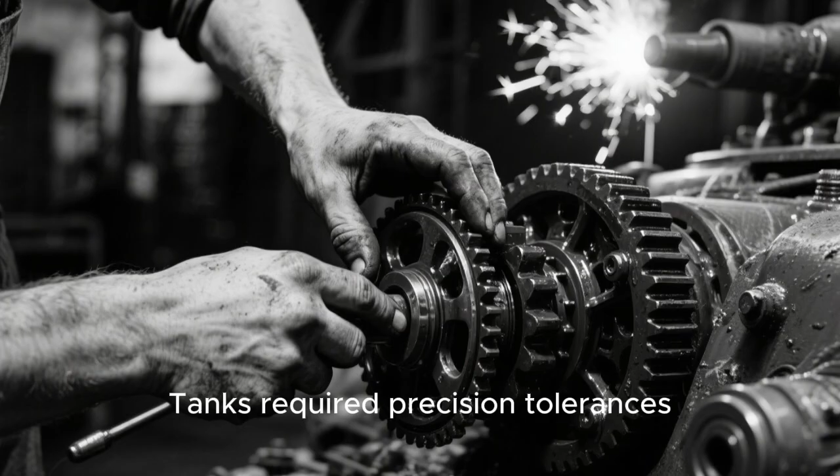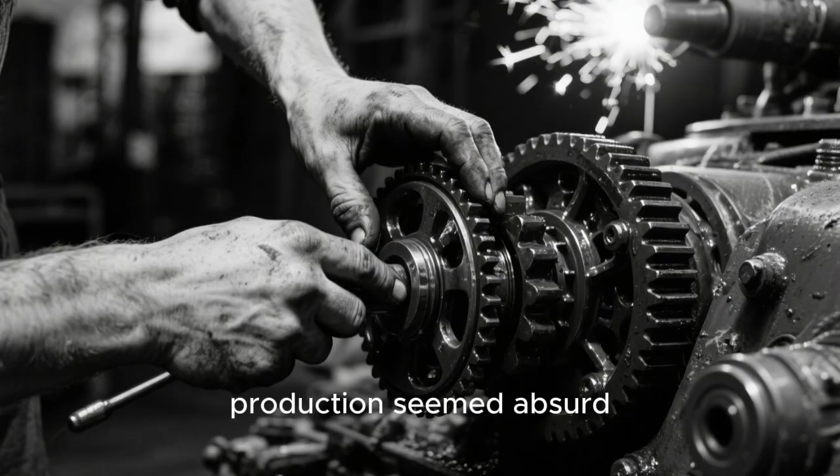Tanks weren't cars. Every military expert said so. Tanks required precision tolerances, specialized armor plate, complex transmission systems, and weapons integration that demanded individual craftsmanship. The very idea of mass production seemed absurd, but Knudsen had heard impossible before.

The British experience told a grim story. According to manufacturing reports from the Ministry of Supply, referenced in David Edgerton's Britain's War Machine, British factories struggled to produce 1,500 tanks annually despite total mobilization. The Germans, with their vaunted industrial efficiency, managed perhaps double that number. Meanwhile, Hitler's panzer divisions were cutting through Soviet defenses, destroying thousands of tanks in weeks. The mathematics were brutal. If America entered this war, current production methods would be utterly inadequate.

The Army brass didn't help matters. General Jacob Devers, chief of the armored force, insisted tanks required specialized facilities and specialized workers. His engineers presented Knudsen with specifications that seemed designed to prevent mass production: custom-cast hulls, hand-fitted turret rings, individually calibrated gun sights. Each component carried tolerances measured in thousandths of inches. One colonel actually argued that assembly line methods would compromise battlefield reliability, as if German shells cared about manufacturing philosophy.

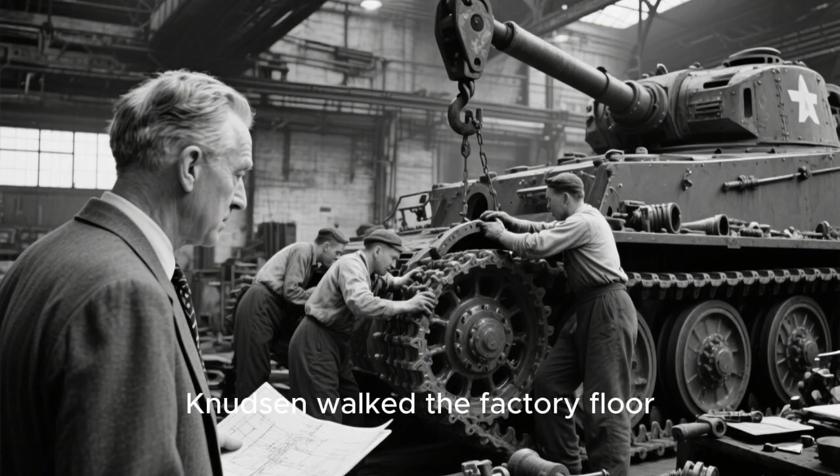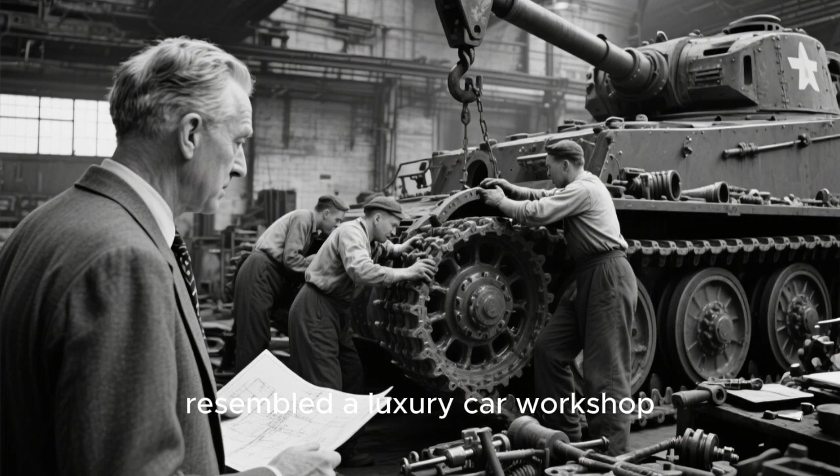Knudsen walked the factory floor, his engineer's eye cataloging inefficiencies. Here, three men spent two days fitting a transmission housing because each tank's frame dimensions varied slightly. There, specialists hand-riveted armor plates in sequences that couldn't be standardized. Overhead cranes moved glacially, positioning components that required precise manual alignment. The whole operation resembled a luxury car workshop, not a wartime production facility.

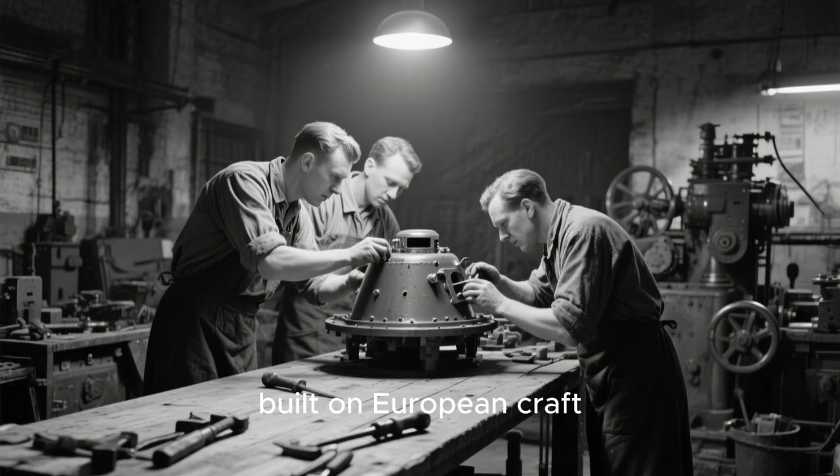The problem wasn't the workers. American industrial labor was the finest in the world. The problem was the process itself, built on European craft traditions that had dominated weapons manufacturing for centuries. Knudsen recognized the challenge immediately. He needed to convince both military leadership and manufacturing engineers to abandon centuries of doctrine and embrace something that had never been attempted at this scale. His impossible blueprint was already forming, though even he couldn't yet see how revolutionary and controversial it would become.

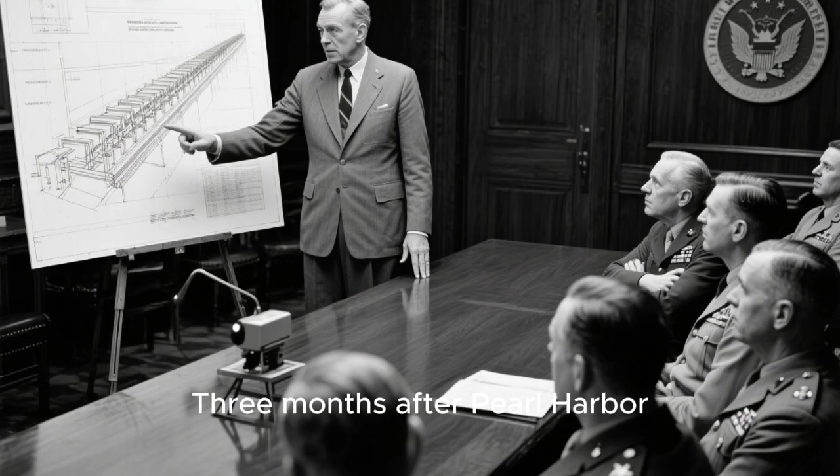Early 1942, three months after Pearl Harbor, Knudsen presented his proposal to a conference room full of skeptical generals at the War Department. The plan looked insane on paper: transform tank production using assembly line principles, standardize every component, and implement interchangeable parts across entire production runs. The target? 500 tanks per month from a single facility, a number that exceeded America's entire annual output just one year earlier. Colonel James Chibber, the Army's chief ordnance officer, spoke first.

"Mr. Knudsen, tanks are not Chevrolets. You cannot simply stamp out armor plate and expect it to withstand 88mm shells." His tone carried the weariness of a professional addressing an amateur. Around the table, heads nodded. These men had spent careers managing weapons production through traditional methods. They understood metallurgy, ballistics, and battlefield requirements. What did a car manufacturer know about warfare?

Knudsen expected this resistance. He'd brought blueprints, production flowcharts, and something else: photographs from the Chrysler Tank Arsenal construction site in Warren, Michigan. The facility, barely broken ground, would become the largest tank production complex in the world. But none of that mattered if he couldn't change how these men thought about manufacturing.

"Gentlemen," Knudsen began, his Danish accent emphasizing each word, "you are correct that tanks are not cars, but production is production. The principles do not change." He unrolled detailed specifications for the M3 medium tank, soon to be replaced by the M4 Sherman. "Every inefficiency in your current system comes from variation. Each tank is slightly different, so nothing is interchangeable. Workers must fit parts individually. You cannot train new labor because every assembly requires judgment. You have created a system that cannot scale."

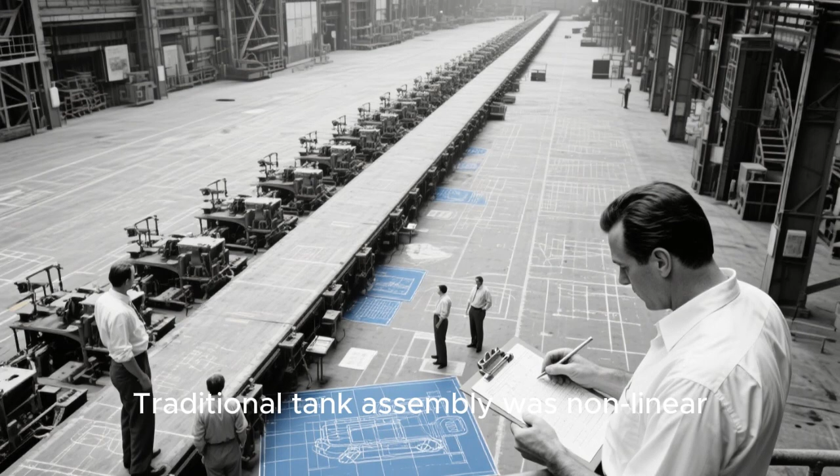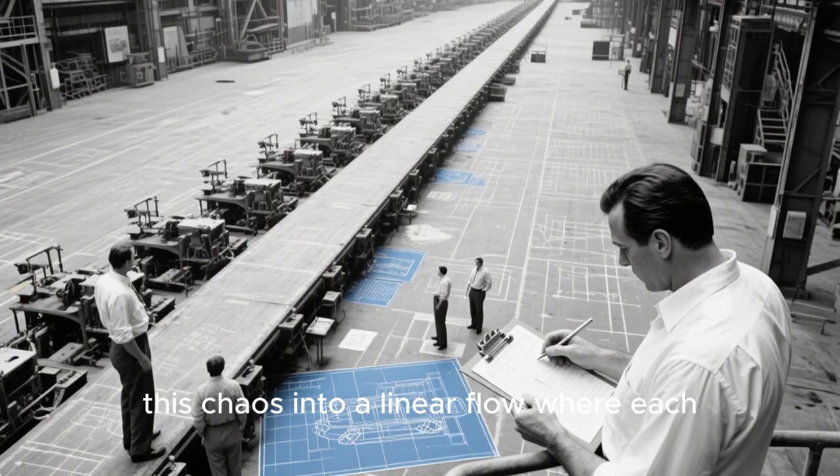The central challenge was sequencing. Traditional tank assembly was non-linear. Different teams worked simultaneously on various components, eventually converging in a final assembly that required extensive fitting and adjustment. Knudsen needed to transform this chaos into a linear flow where each station added specific components in a predetermined order, with each tank moving continuously through the facility, like cars through a Ford plant.

Edward Rushton, a former Ford production supervisor, led the floor planning team. His task seemed impossible: map every single operation required to build a Sherman tank, determine their optimal sequence, calculate precise timing for each station, and design tooling that would allow semi-skilled workers to perform tasks that currently required craftsmen.

Rushton's team created a massive flowchart that covered an entire warehouse wall, tracking dozens of parallel sub-assembly lines that would feed into the main production sequence.

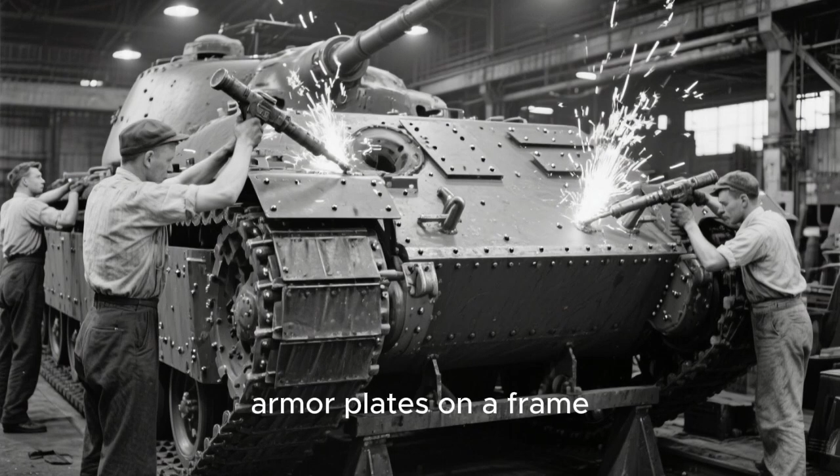The hull assembly illustrated the challenge. Traditional methods involved positioning armor plates on a frame, hand-drilling thousands of rivet holes to match each plate's unique position, then riveting them in place—a process taking days. Knudsen's system required pre-drilling all holes in stamped plates at a separate station, using precision jigs that ensured every plate was identical. Workers at the hull station would simply position plates against standardized fixtures and rivet them in predetermined patterns. No measuring, no marking, no custom fitting.

Critics called it a fantasy. Colonel Raymond Barker, assigned as military liaison to the project, watched early tests with barely concealed skepticism. 'You're assuming perfect parts,' he observed, as workers struggled to fit a transmission housing that was millimeters off specification. 'In reality, nothing is perfect. That's why skilled fitters are essential. They compensate for variation.'

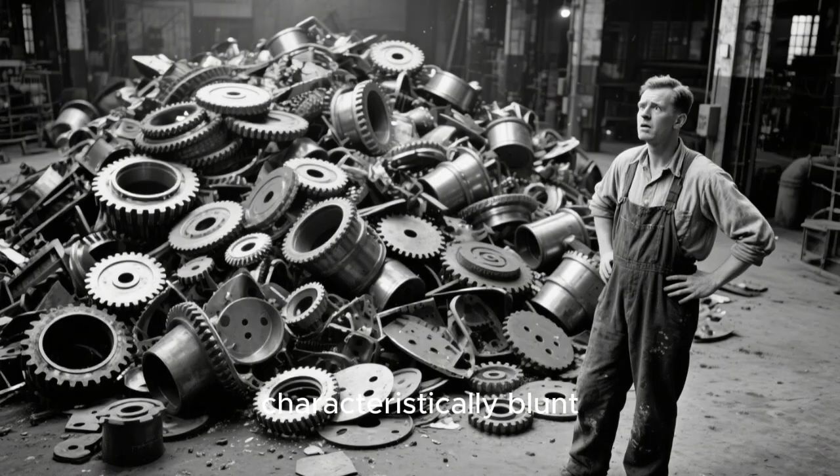Knudsen's response was characteristically blunt: 'Then we must eliminate the variation.' He established quality standards more rigorous than anything in automotive production. Suppliers received specifications with tolerances measured in 10,000ths of an inch. Components that deviated were rejected entirely, not adjusted. Early rejection rates exceeded 30%, creating supplier chaos.

One transmission manufacturer called Knudsen's standards theoretically achievable but practically impossible. According to War Production Board documents, referenced in Arthur Herman's Freedom's Forge, Knudsen personally visited struggling suppliers, bringing automotive quality control experts who taught precision manufacturing techniques.

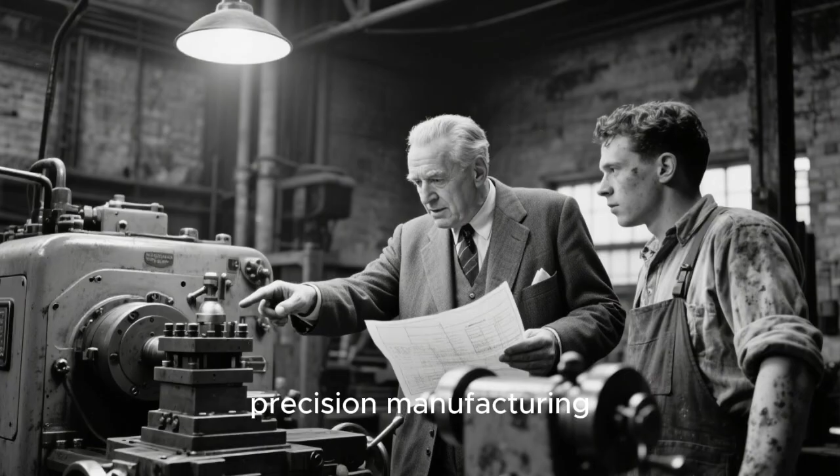He replaced suppliers who couldn't meet specifications, even when it meant short-term production delays. The message was clear: the system required perfect parts, and nothing less would be accepted.

Meanwhile, the human element presented equal challenges. Traditional tank workers were skilled craftsmen with years of metalworking experience. Knudsen's system needed thousands of workers who could learn specific tasks in days, not years.

Industrial psychologist Adelaide North joined the team, studying how to break complex operations into simple, repeatable motions. She developed training programs that taught single operations in isolation, then gradually introduced workers to adjacent tasks.

The approach seemed dehumanizing to some observers. Workers weren't learning a trade; they were learning to perform specific limited operations. Union representatives worried about de-skilling labor, reducing proud craftsmen to interchangeable machine tenders.

Knudsen acknowledged the concern but remained pragmatic. "We need 10,000 workers in 6 months. We cannot train 10,000 craftsmen. We can train 10,000 specialists."

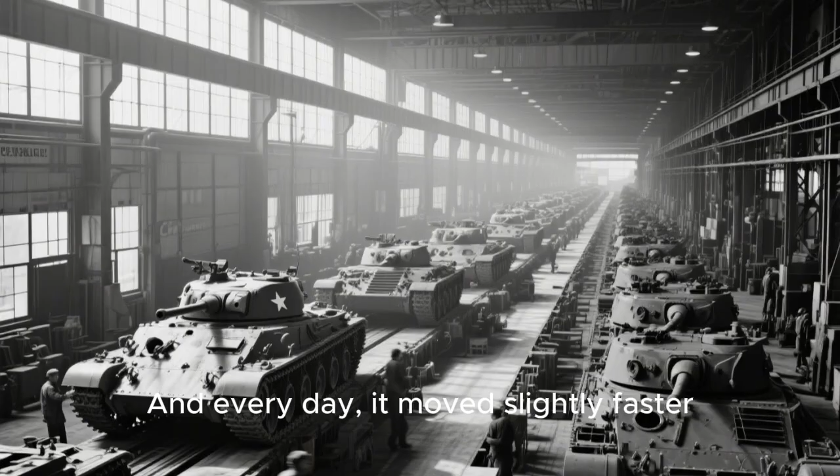By May 1942, the first Sherman tanks began moving through the prototype assembly line. They moved slowly, far slower than Knudsen's projections. Bottlenecks appeared at unpredictable stations. Tooling failed. Workers struggled with sequencing. The first assembly line Sherman took nearly as long to build as a handcrafted tank, but it moved, and every day it moved slightly faster.

The real test was approaching. Could this system produce combat-ready tanks that would actually work in battle?

The first 50 assembly line Sherman tanks rolled out of the Chrysler Arsenal in July 1942, their olive-drab paint still curing as they were loaded onto railcars bound for California, then ships to the Pacific. Knudsen felt no celebration, only grim awareness that his untested system was about to face the ultimate validation. If these tanks failed in combat because of production shortcuts or quality issues, his entire program would collapse. The Army would revert to traditional manufacturing, and America's tank production would remain inadequate for a two-front war.

The Marines received the Shermans at Guadalcanal with desperate gratitude. They'd been fighting with M3 Stuarts, light tanks that were outgunned and under-armored against Japanese positions. The Shermans represented a massive firepower increase. But would they actually work? Tank crews examined them with suspicious eyes, comparing these mass-produced machines to the handcrafted tanks they'd trained on.

Lieutenant Harold Bauer commanded one of the first Sherman platoons into combat. His after-action report, preserved in Marine Corps archives, revealed immediate problems. One tank's transmission failed after just 8 hours of operation. Another experienced turret ring jamming, the kind of issue that occurred when parts weren't properly fitted. A third developed engine problems that mechanics traced to inconsistent assembly of the cooling system. Out of 12 tanks in the initial deployment, 4 experienced mechanical failures within the first week.

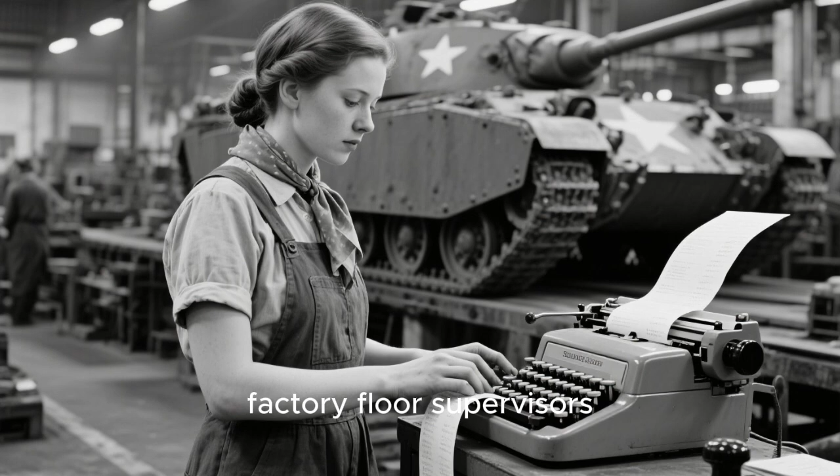Knudsen didn't defend the failures. Instead, he implemented what became known as battle line feedback, a direct communication channel between combat units and factory floor supervisors. When a tank failed in combat, engineers in Detroit would receive detailed reports within 48 hours. They would identify the root cause, implement corrections, and track whether the issue recurred. This created an unprecedented feedback loop between battlefield performance and manufacturing process.

The improvements came rapidly. The supplier with quality control problems was given 2 weeks to meet specifications or be replaced. They met the deadline. The assembly sequence causing engine issues was reorganized, with additional verification steps. Most significantly, Knudsen established a combat simulation protocol where every 10th tank would be subjected to accelerated stress testing before shipment, identifying potential failures before they reached combat zones.

By August, the second wave of Shermans reached the Pacific with dramatically improved reliability. According to military logistics records, documented in R. Elberton Smith's official Army history, The Army and Economic Mobilization, operational readiness rates exceeded 80%, higher than handcrafted tanks produced through traditional methods.

The assembly line Shermans weren't just adequate, they were becoming genuinely reliable. But reliability alone wouldn't win the argument. Knudsen needed to prove that his system could scale, that the Chrysler arsenal could actually produce tanks at rates that would change the strategic calculus of the war. The generals had given him a production target that still seemed impossible: 1,000 tanks per month by December 1942.

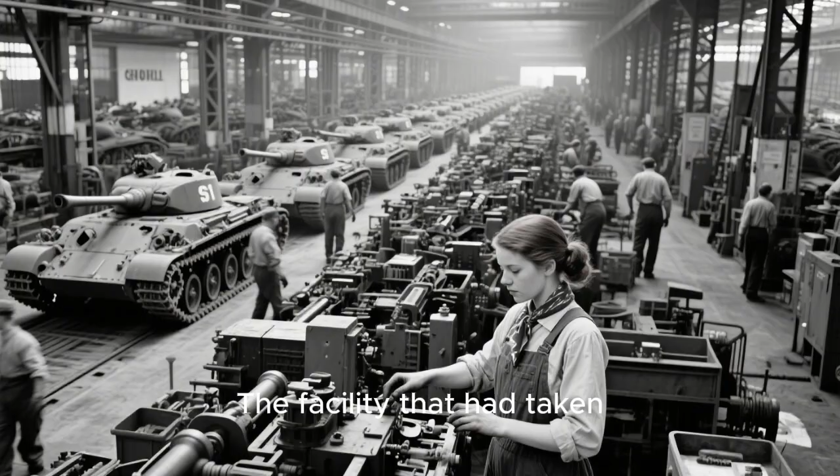As summer turned to autumn, the assembly lines accelerated. The facility that had taken weeks to produce a single tank was now completing tanks in days. Workers who had fumbled with unfamiliar tools now moved with choreographed precision. The impossible was becoming routine. But Knudsen knew the real test was still coming: could American industry not just build tanks, but build them so rapidly that quantity itself would become a weapon?

Autumn 1942. By October, the Chrysler tank arsenal operated 24 hours daily across 3 shifts, and the assembly line had achieved something that would have seemed like fiction just one year earlier. A completed Sherman tank rolled off the line every 4 hours.

Knudsen stood on the observation platform overlooking the main production floor, watching the choreographed chaos below. 600 workers moved through their specialized tasks: welding, riveting, installing, testing. Each person a precisely positioned element in a mechanical ballet.

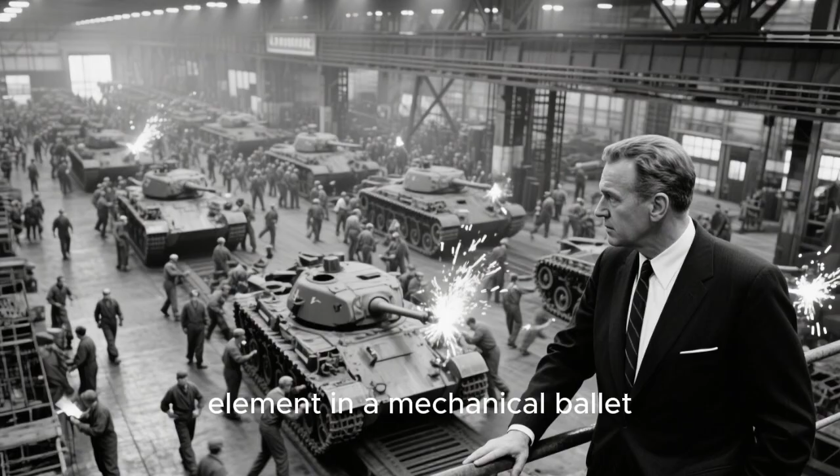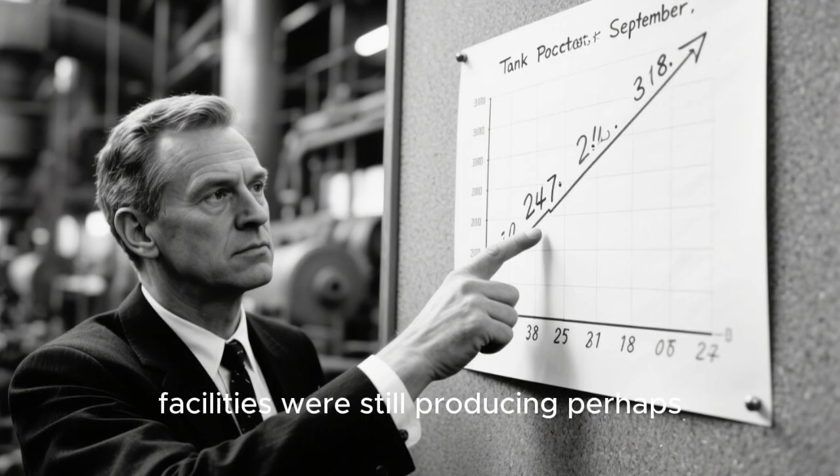The numbers told a story that military planners were only beginning to comprehend. In September, the arsenal had produced 247 tanks. In October, 318. The trajectory was clear. By year's end, monthly production would exceed 1,000 vehicles. Meanwhile, traditional manufacturing facilities were still producing perhaps 50 tanks monthly, despite working at full capacity. Knudsen's impossible system was outproducing conventional methods by a factor of 20.

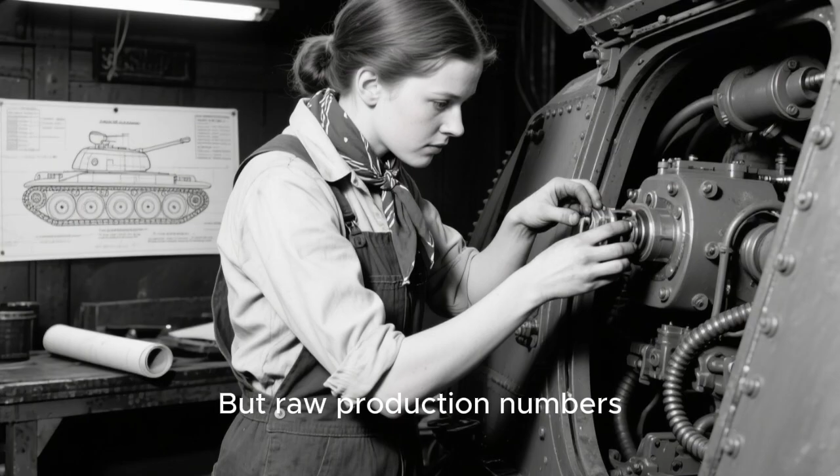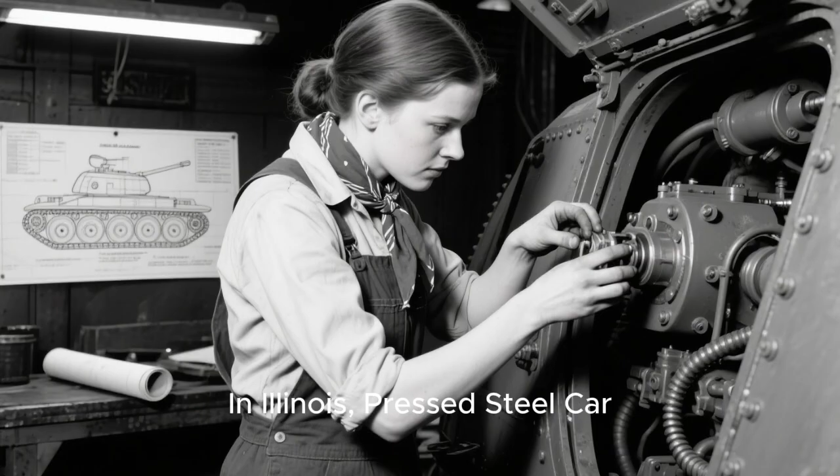But raw production numbers masked a more profound transformation. The real revolution wasn't speed, it was scalability and standardization. Because every component was interchangeable and every process was documented, Knudsen could replicate the entire system. In Pennsylvania, the Baldwin Locomotive Works was converting to tank production using Chrysler's blueprints. In Illinois, Pressed Steel Car Company was building an identical facility. Fisher Body, Ford, Pacific Car, and Foundry, industrial giants, were preparing to join the production network, each using the same standardized processes, parts, and specifications.

General George Marshall, Army Chief of Staff, visited the arsenal in November. He walked the production floor with Knudsen, observing workers who'd been farmhands or retail clerks 6 months earlier, now assembling complex military vehicles. At one station, a woman named Dorothy Henson was installing periscope assemblies, a task requiring precise alignment and focus, but only 3 days of training. Marshall watched her complete 4 installations in 20 minutes, each one identical.

"How many workers do you have here?" Marshall asked. "Currently 6,200," Knudsen replied. "We will add another 2,000 by January." And they're producing over 300 tanks monthly with a workforce smaller than a single battleship construction project.

Marshall wasn't asking a question, he was processing the implications. Naval shipyards employed tens of thousands to produce individual vessels over years. Knudsen was producing complex armored vehicles with comparable capability, using a fraction of the labor in weeks instead of months.

The strategic calculus was shifting. British and Soviet intelligence reported German tank production at approximately 500 units monthly across all factories, about half what Chrysler alone would achieve by year's end. When the other American facilities came online in 1943, total American tank production could exceed 3,000 monthly. The Germans, even with their captured European industrial base, couldn't match those numbers.

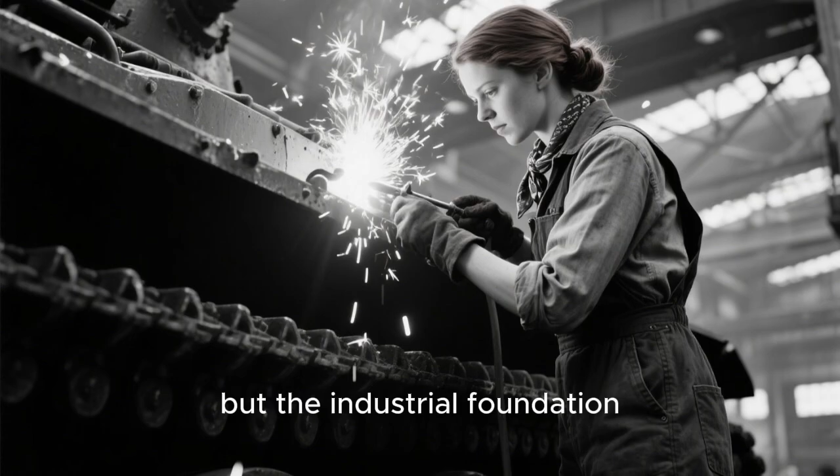By December 1942, the Chrysler arsenal achieved its target: 1,037 Sherman tanks completed in a single month. President Roosevelt personally called Knudsen to offer congratulations, but Knudsen barely acknowledged the achievement. He was already focused on the next challenge: accelerating production even further while reducing costs. The war was far from over, but the industrial foundation for Allied victory was being welded together on the factory floors of Detroit. Winter, 1943.

The production numbers looked triumphant in War Department briefings: 4,000 tanks per month flowing from American factories by February 1943, an industrial achievement without historical precedent. But inside the Chrysler tank arsenal, William Knudsen faced a crisis that couldn't be solved with engineering diagrams or process optimization.

The human cost of his assembly line system was becoming impossible to ignore. Worker injury rates had climbed steadily as production accelerated. In January 1943 alone, the arsenal recorded 147 serious injuries: crushed fingers from stamping presses, burns from welding stations, lacerations from metal edges, back injuries from repetitive lifting. The facility's medical station, designed for minor first aid, was overwhelmed. Three workers had died in industrial accidents since production began, their deaths investigated by Army safety inspectors who found that speed pressures contributed to inadequate safety protocols.

Catherine Wells, a labor organizer with the United Auto Workers, confronted Knudsen in his office one February morning. She brought photographs: workers with bandaged hands, a young man on crutches after a loading accident, documentation of 12-hour shifts with minimal breaks. "You're sacrificing these people to your production schedules," she accused. "They're not machine parts that can be replaced when they break."

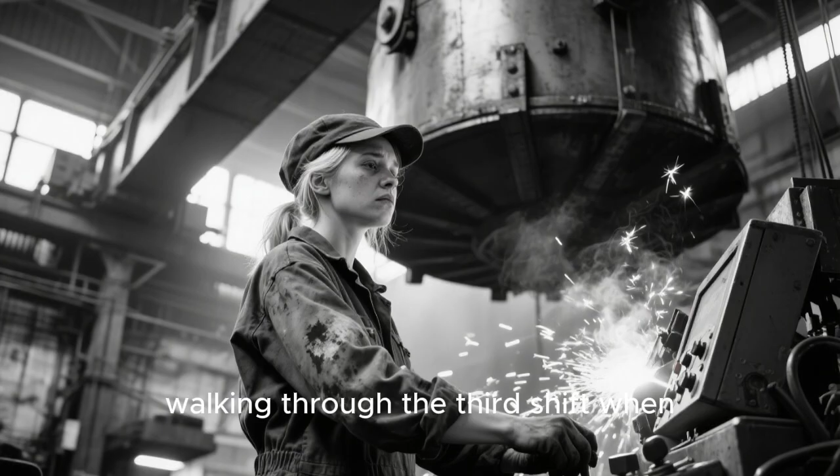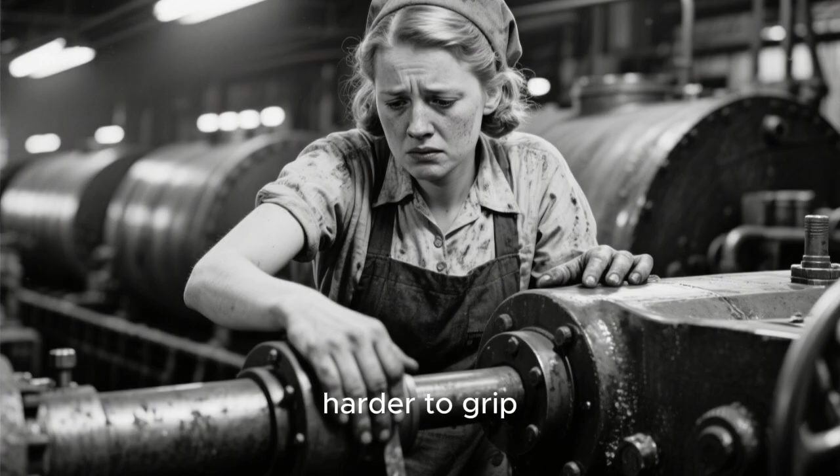Knudsen visited the factory floor that night, walking through the third shift when exhaustion was most visible. He watched a young woman named Alice Porter operating a turret-mounting crane, her movements mechanical after nine hours on shift. He saw the safety violation immediately: she'd removed her protective gloves because they made the controls harder to grip. One mistake, one moment of fatigue, and she could lose fingers or worse. This was happening throughout the facility, invisible shortcuts taken by exhausted workers trying to meet production quotas.

The next morning, Knudsen did something that shocked the War Department. He ordered production reduced by 20% while safety systems were completely overhauled. Every dangerous operation was halted, analyzed, and redesigned with worker protection as primary consideration. Safety guards were redesigned to be less obtrusive but impossible to bypass. Shift lengths were reduced, mandatory rest periods were enforced, and the arsenal hired 50 additional safety supervisors whose sole job was preventing injuries, even if it meant stopping production.

General Devers called personally. "You're cutting tank production during active military operations. Do you understand what you're doing?" "I understand that injured workers cannot produce tanks," Knudsen replied. "I understand that exhausted workers make mistakes that cause quality problems. And I understand that we cannot win this war by destroying the people building our weapons."

The production statistics for March 1943 showed the impact: 841 tanks instead of the projected 1,000. War Department officials were furious. Some called for Knudsen's replacement.

But by April, something unexpected happened. Production recovered to 963 tanks, approaching previous levels despite shorter shifts and stricter safety protocols. Worker injury rates dropped by 40%. Quality defect rates decreased noticeably. According to labor studies conducted by the War Manpower Commission, documented in Amy Kesselman's Fleeting Opportunities, Knudsen's arsenal became a model for sustainable wartime production.

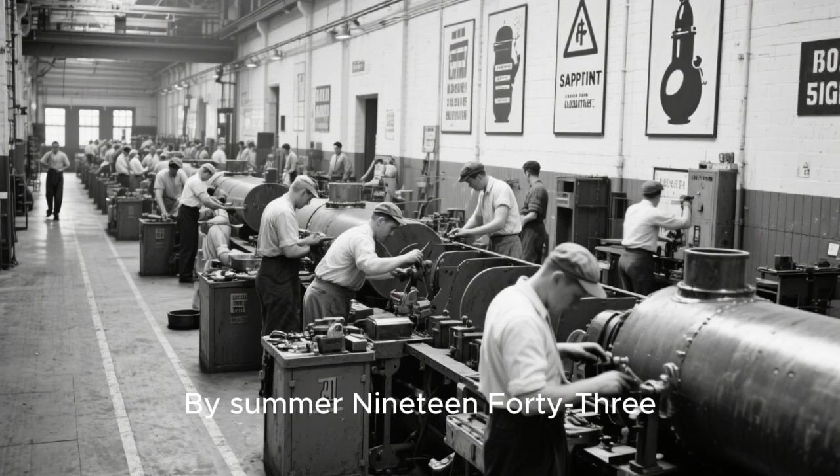The lesson extended beyond simple humanitarianism. Knudsen realized that his original system had been incomplete. It had optimized for mechanical efficiency while treating human workers as infinitely replaceable components. The revised system acknowledged that people weren't machines, that sustainable production required protecting the workforce as carefully as maintaining the machinery.

By summer 1943, other war production facilities began adopting the arsenal's safety protocols. The system Knudsen had pioneered was evolving beyond pure efficiency toward something more complex, an industrial model that balanced production demands with human welfare. But even as the domestic production system matured, the global strategic situation was creating new challenges that would test whether Knudsen's industrial revolution could adapt to changing battlefield requirements.

Summer 1943 through winter 1944. The telegram from General Omar Bradley arrived at Knudsen's office in July 1943, marked urgent: Sherman inadequate against new German armor. Require immediate design modifications. Cannot wait for traditional development cycle.

The message confirmed Knudsen's worst fear. Battlefield requirements were changing faster than his production system could adapt. The Germans had deployed heavier tanks with thicker armor and more powerful guns. American Shermans, designed for mass production in 1941, were becoming obsolete. Traditional military procurement would have required years to design, test, and produce an entirely new tank.

The Army's Ordnance Department had already begun work on the M26 Pershing, a heavy tank designed to match German Tigers, but the Pershing wouldn't enter production until late 1944 at the earliest. Bradley needed solutions immediately, and Knudsen's assembly line system seemed to be the very obstacle preventing rapid adaptation.

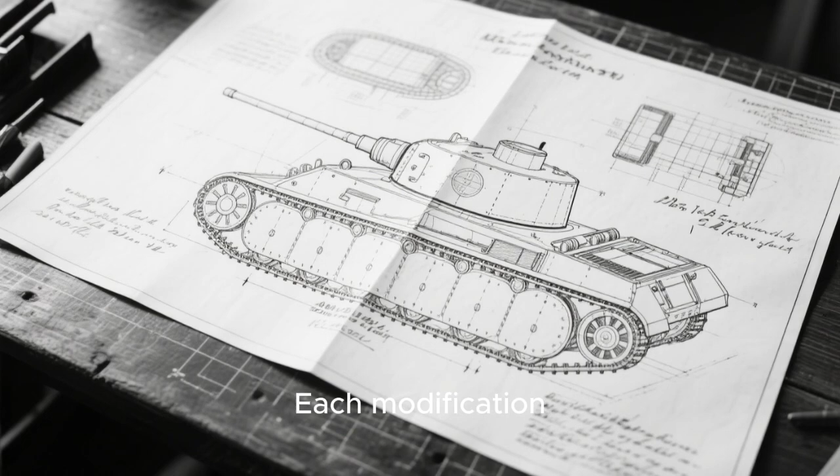The approach required thinking about the Sherman not as a fixed design, but as a platform, a standardized structure that could accept multiple configurations. Each modification would be tested individually, then gradually integrated into production. At any given time, the assembly line might be producing several Sherman variants simultaneously, each incorporating different combinations of upgrades.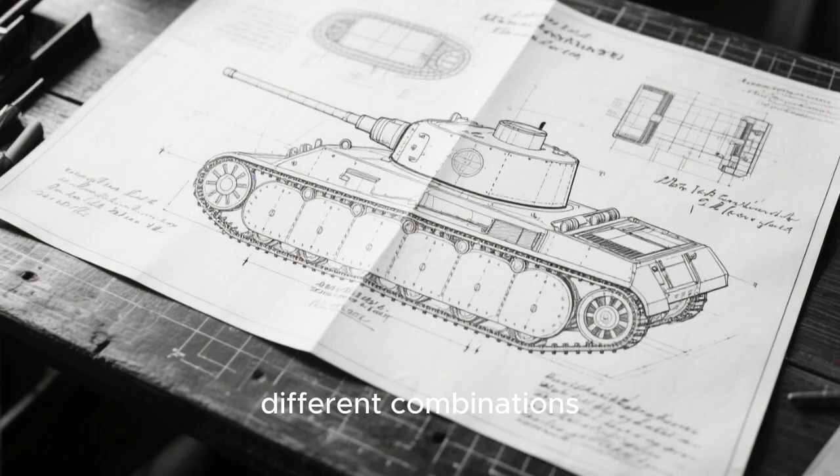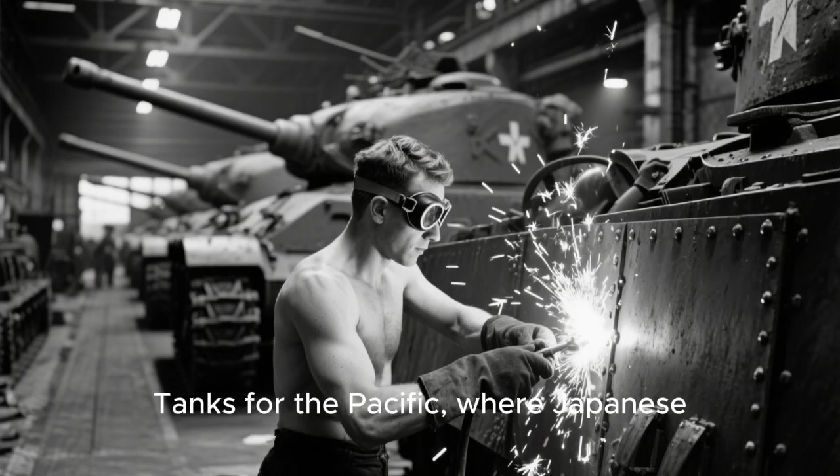Implementation proved extraordinarily complex. Consider the armor upgrade: engineers designed applique plates, additional armor welded onto existing hulls, that could be added at a dedicated station inserted into the production sequence. Tanks destined for the European theater, where they'd face heavy German armor, received the upgrade. Tanks for the Pacific, where Japanese anti-tank weapons were less formidable, continued with standard armor. The same assembly line was now producing differentiated products.

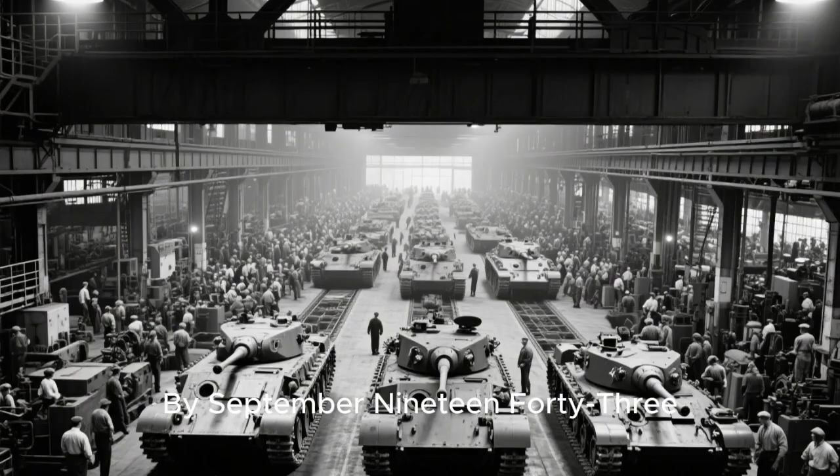By September 1943, the Arsenal was manufacturing 4 distinct Sherman variants simultaneously, each optimized for different combat scenarios: the M4A3 with a more powerful gun and improved armor, the M4A4 with revised suspension for European terrain, the M4A3E8 with wider tracks for better mobility, and the standard M4 for situations where basic capability was sufficient.

Production complexity increased enormously, but the system absorbed it. According to military logistics records, referenced in Steven Zaloga's comprehensive Armored Thunderbolt, this production flexibility gave American forces an unprecedented advantage.

When intelligence revealed German tank deployments in specific sectors, American commanders could request Sherman variants optimized for those threats. Units in Italy received tanks with improved hill climbing capability. Forces in France got tanks with enhanced frontal armor. Pacific units received standard versions where weight savings improved strategic mobility.

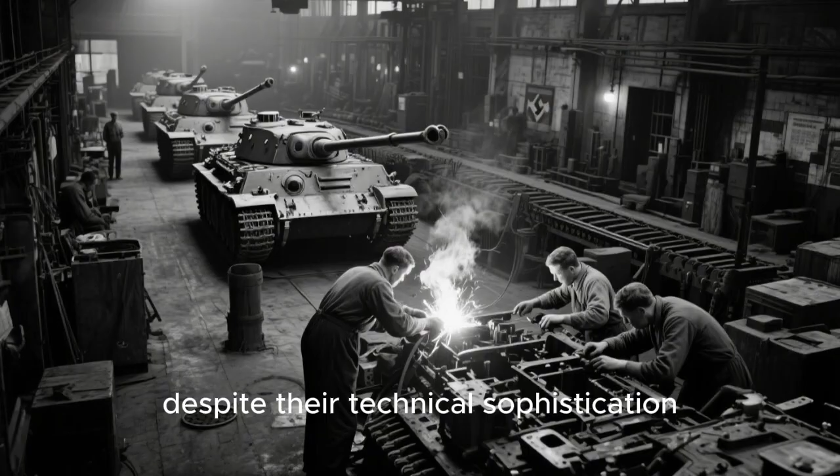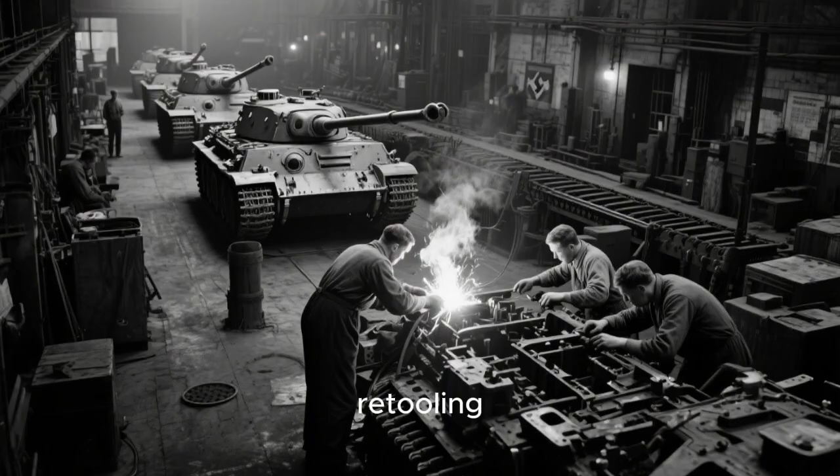The Germans, despite their technical sophistication, couldn't match this adaptability. Their superior tanks required specialized production facilities and highly skilled labor. Each design change meant months of retooling. They couldn't rapidly respond to battlefield feedback because their craft-based manufacturing system wasn't designed for quick iteration.

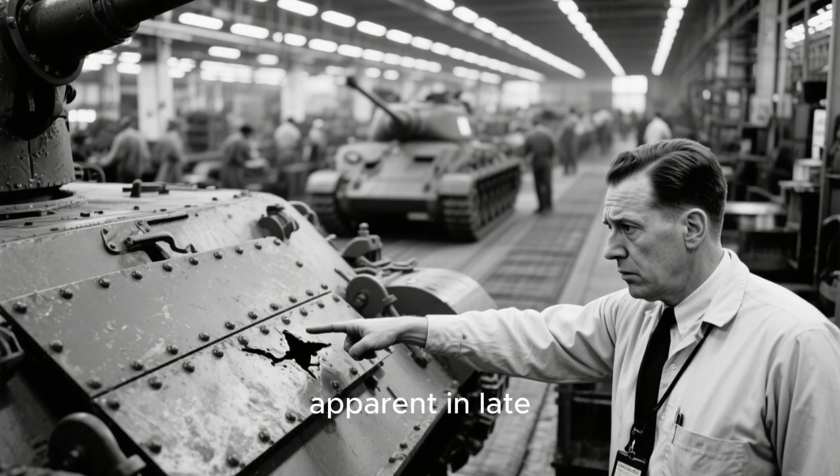But Knudsen's system had a hidden vulnerability that became apparent in late 1943. Complexity was creating new quality control challenges. With multiple variants moving through the same production lines, workers had to identify which configuration they were building and apply appropriate components. Mistakes were inevitable.

In December, inspectors discovered that 73 tanks had been shipped with incorrect armor specifications, a quality control failure that could have been catastrophic in combat.

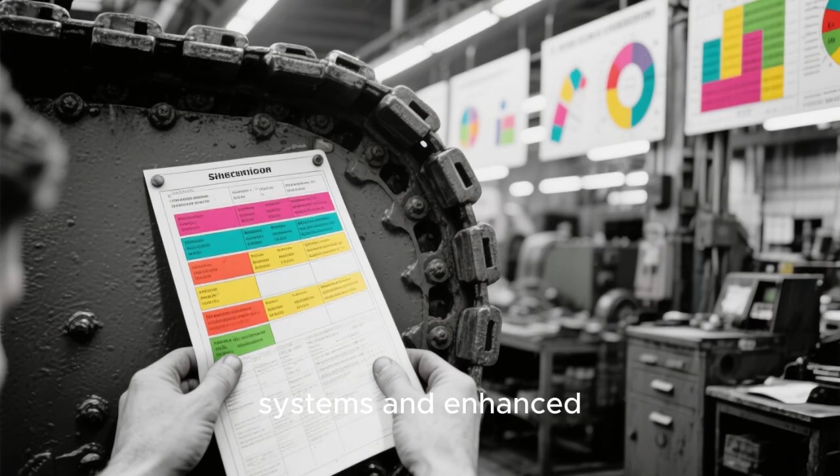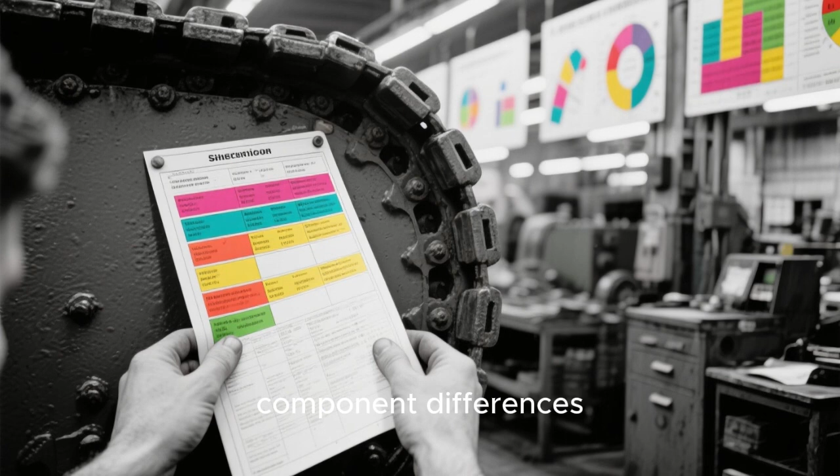Knudsen responded by implementing color coding systems and enhanced documentation that traveled with each tank through production. Every vehicle received a specification card indicating its configuration. Each workstation had visual guides showing component differences between variants. The system evolved from simple standardization toward managed complexity, maintaining production speed while handling unprecedented variation.

By early 1944, as Allied forces prepared for the Normandy invasion, American factories were producing over 5,000 tanks monthly in multiple configurations. The assembly line system that critics had called inflexible had proven more adaptable than traditional manufacturing methods.

Knudsen had created something unique in industrial history: mass production with custom variation, combining the efficiency of standardization with the responsiveness of craft production. But the ultimate test was approaching: the invasion of Europe, where his tanks would face the German war machine in battles that would determine civilization's future.

Spring 1944, through victory. When Allied forces stormed the Normandy beaches on June 6, 1944, more than 2,000 Sherman tanks supported the invasion, a concentration of armored force that would have been unthinkable just three years earlier. General Dwight Eisenhower stood on the English coast watching waves of landing craft approach the French shore, knowing that Knudsen's production system had made this moment possible.

The operation's success didn't depend on having the best tanks. It depended on having enough tanks to overwhelm German defenses through sheer numerical superiority. The brutal mathematics of the European campaign validated Knudsen's fundamental insight. German Tiger and Panther tanks were individually superior to Shermans: more armor, bigger guns, better battlefield performance. But American production had achieved a staggering 5-to-1 numerical advantage. For every German tank produced, 5 Shermans rolled off American assembly lines. Allied commanders could afford to lose 2 or 3 Shermans destroying a single German tank and still maintain operational superiority.

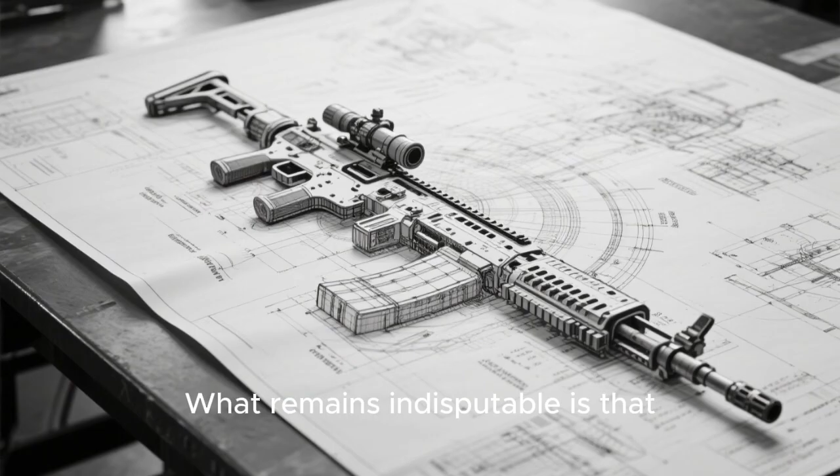What remains indisputable is that Knudsen's impossible blueprint changed how nations think about industrial mobilization. He proved that with proper engineering, even complex weapon systems could be mass-produced. He demonstrated that standardization and flexibility weren't contradictory. They could be integrated through thoughtful system design. Most significantly, he showed that production itself could be a strategic weapon, that overwhelming quantity could compensate for individual product limitations.

When William Knudsen died in April 1948 at the age of 69, his obituaries focused on his automotive career, the man who'd helped build General Motors into an industrial giant. Few mentioned that his greatest contribution wasn't building cars for peacetime prosperity, but transforming how democracies could mobilize industrial power against totalitarian threats.

The assembly line tank production system he pioneered became the template for Cold War military manufacturing. When America needed aircraft carriers, jet fighters, or nuclear submarines, planners studied Knudsen's methods: standardization, interchangeable components, continuous improvement, modular design.

The principles he'd fought to implement against skeptical generals became orthodox doctrine taught at military academies and business schools worldwide. Yet the deeper legacy remained ambiguous.

Post-war analysis by the Strategic Bombing Survey revealed that German tank crews genuinely feared Shermans, not because of their combat capabilities, but because of their inexhaustibility. A German panzer commander interviewed in 1946 described the psychological impact: 'We could destroy 5, 10, even 15 enemy tanks, but more always came. Eventually you realized that destroying enemy tanks was meaningless. They had infinite tanks. We did not.'